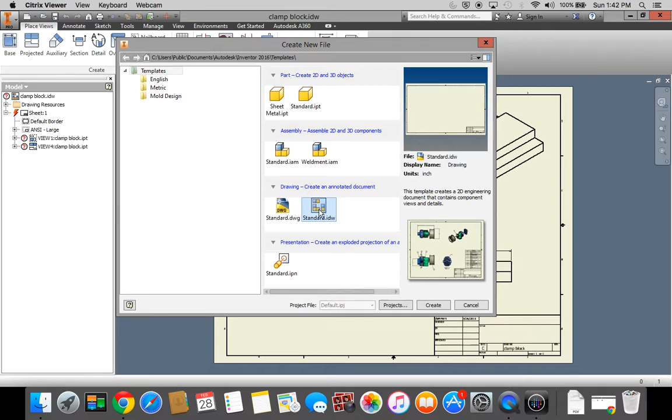Let's begin. Start with New, Standard IDW, click Create. We're going to go to the left-hand side in our browser where we see Sheet 1, right-click, Edit Sheet. We're going to change it from a D size paper to a C size paper. Click OK. We're going to go to our top ribbon, Base View.

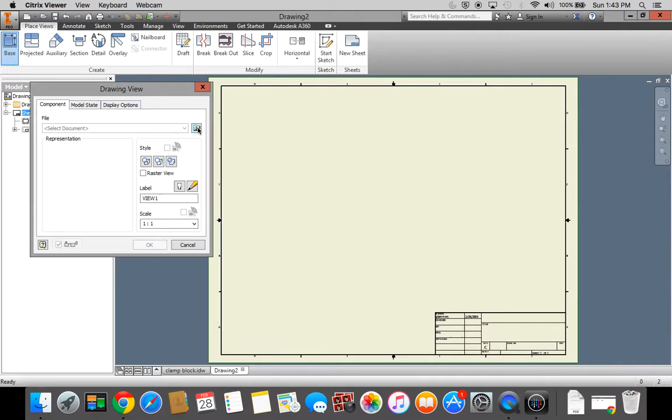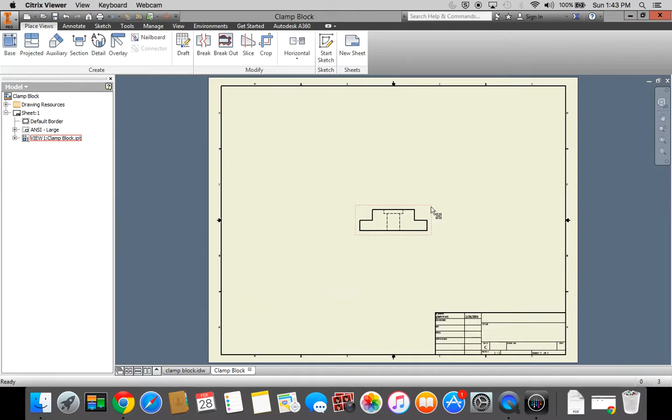Click on our Browse folder here. We're going to make sure we're in our H drive, first initial last name 000. We're going to get our clamp block. You can do this with any of the other things that you created. Select Open. Click OK. When I move my cursor here to the front view, I get a dotted line that goes around the whole entire shape.

I'm going to click, and I'm going to position this in the lower left-hand corner since this is my front view. Next, I'm going to go to my ribbon, and I'm going to go to Projected. Now, mine automatically snaps here and is attached to my cursor. However, if it does not, when I click Projected, I can click my front view, and then it picks up my drawings that are attached to my cursor.

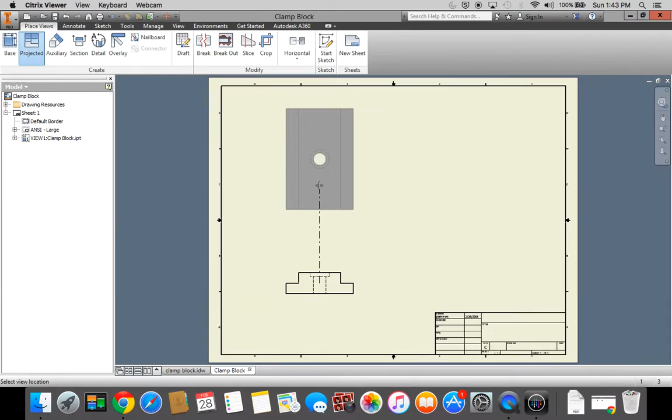I'm going to click when I get my top view located in the right spot. I'm going to click when I get my right view located in the right spot, and pictorial isometric. Click. Then I'm going to right click and create.

Next, I want to put these dimensions on here to match this drawing. In order to do that, I'm going to change up here in the top from Place Views to Annotate, and I'm going to get my dimension. I'm going to match my dimensions to the bottom here by clicking and placing my dimensions on.

If you don't like this Edit Dimension screen coming up, you can deselect it by check marking here. Click OK, and that won't pop up anymore. I'm going to continue to dimension until I get all of my dimensions on.

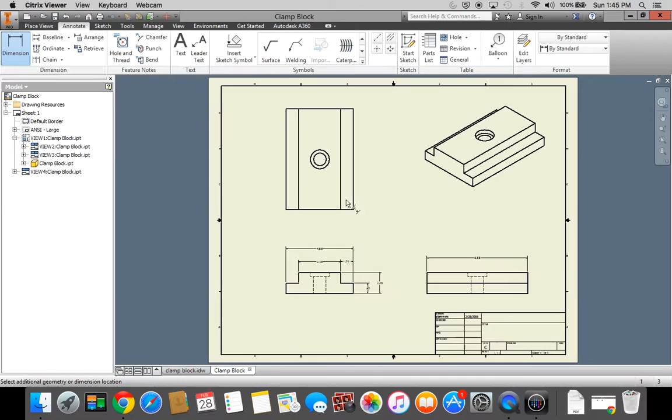Let's check our sheet. We need these two dimensions for the hole and this counterbore depth. Dimension, center of my hole. Dimension from the center of my hole to the bottom. Oops. Click OK. Dimension from the center of my hole. Clicked it again. Sorry. Want to make sure we're zooming in sometimes, and we got to select the center of that hole and the bottom of my edge.

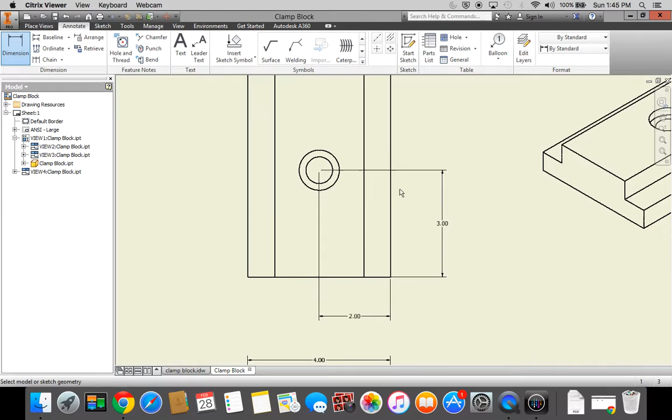There we go. And next, in order to get the specification for the hole that's drilled, we're going to use our hole and thread tool. Click your outside circle. Click to place it. Zoom all. You now have a pictorial isometric and multi-view drawing done and created.

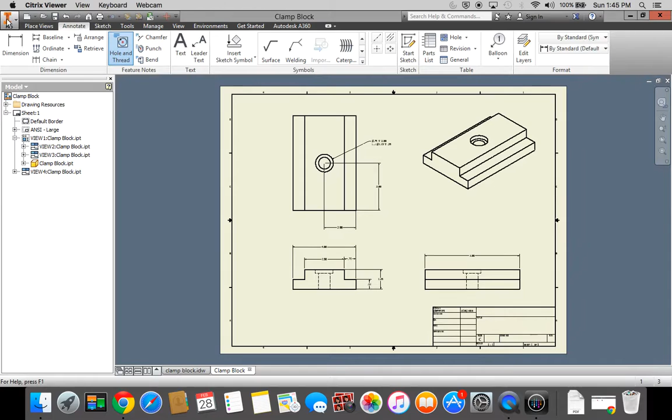Make sure you go up to the top orange capital letter I. Save as. Make sure it's in your H drive, first initial last name 000. It automatically will title it the clamp block. Click Save. Congratulations, you are done.